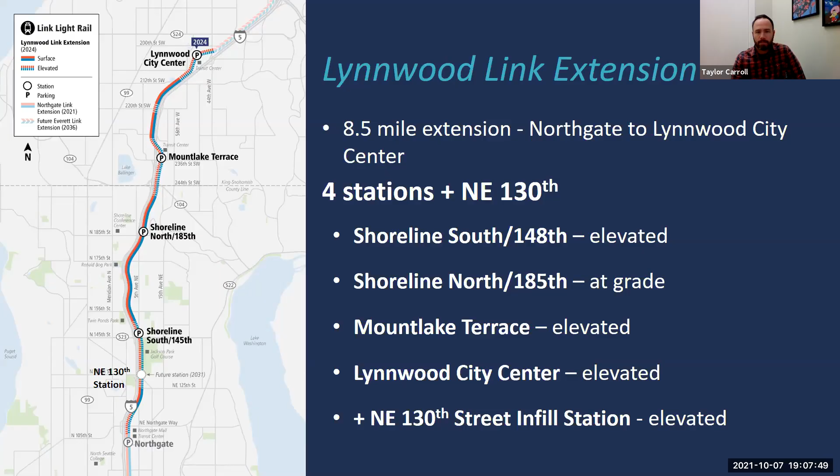So I have a couple slides here that dive into the Shoreline South 148th station. I recognize some of you may know this as the 145th station, and yes, the name of it has changed to the 148th. It's a more accurate description of where the station is actually now located, at the site of the former North Jackson Park and Ride.

As you see here, we have this great aerial view of a rendering. This station is a pretty large station that has bus turnarounds located within the station footprint, as well as an over 500 stall parking garage. And then it's an elevated station serving that community in this area.

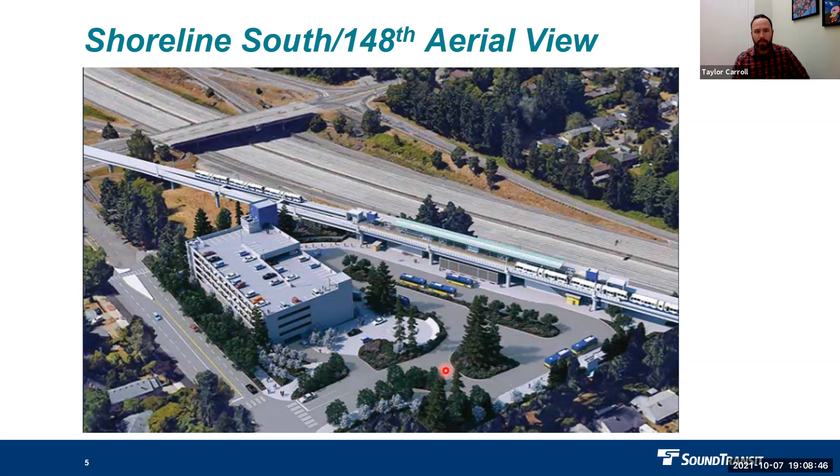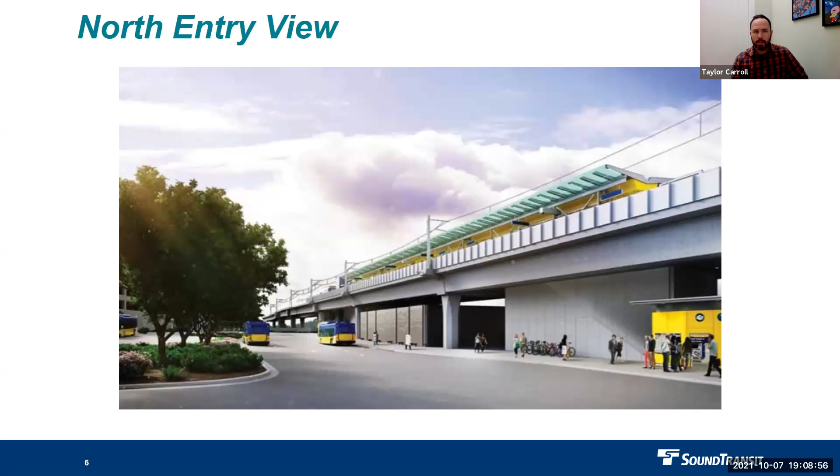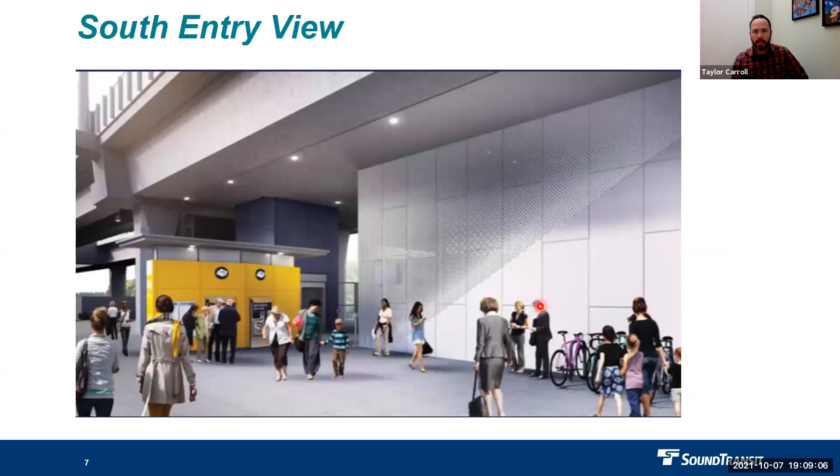A few other slides just to show some renderings of what the finished station will look like. Here's a view from the north entry. Here's a closer up view of the south entry with ticket kiosk, escalators going up. Up on the platform, the view looking south, you can see the garage in the distance there.

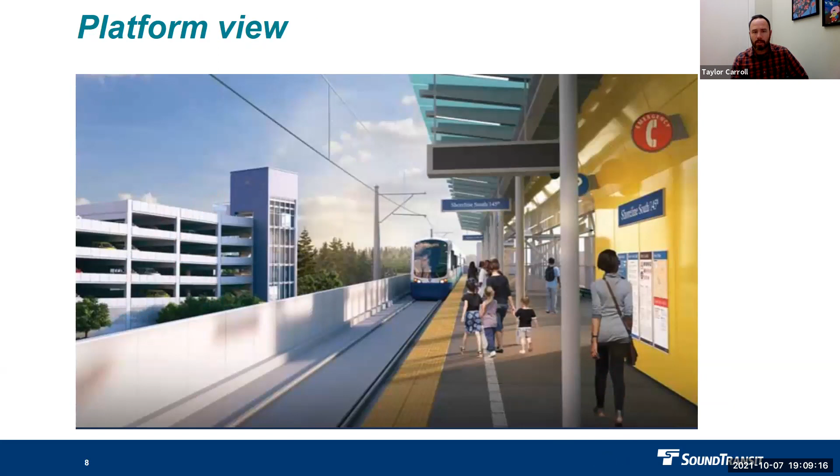And then here's a view of the station garage, which will serve patrons getting to and from the station who are coming from a little bit farther and are driving to the station.

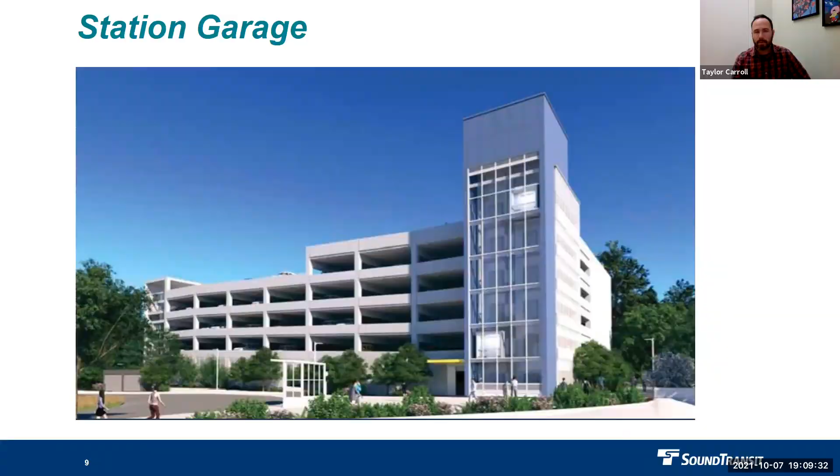All right, now the topic we've been waiting for, the Northeast 130th infill station. As Renee mentioned, there's been a lot of history around the Northeast 130th infill station. It all came to fruition with the passage of the 2016 ST3 voter package. In that voter package, we had a timeline of starting the work on the station in 2024 with an opening date of 2031.

However, over the past couple of years, we've had the realization that working on an infill station during an active line creates difficulties with construction, and so we started looking at accelerating the timeline of the project. Over the years we've accelerated the design, and this all culminated with the latest discussions at the board with the realignment in August of just this year. They've decided to have an opening date of 2025 for this station.

Hopefully you all know where it's located. It's in North Seattle at the corner of 5th Avenue Northeast and Northeast 130th. A few details of the station: it's an elevated side platform station. The majority of stations that Sound Transit builds are all center platform stations.

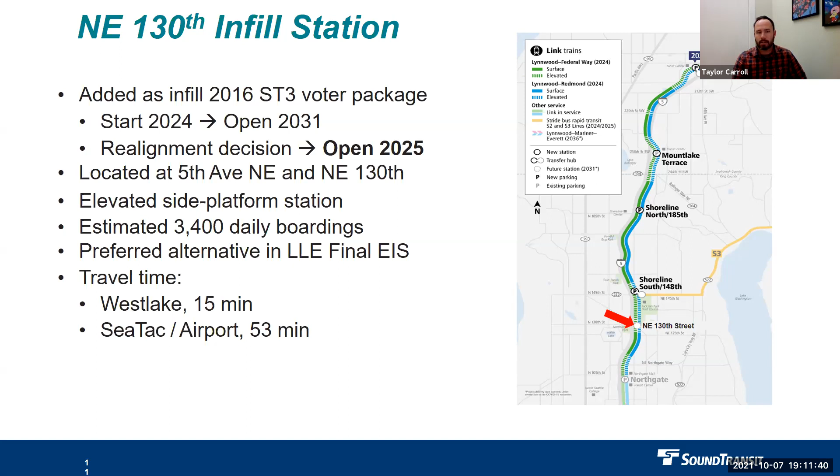Estimated 3,400 daily boardings. And you can see some travel times here to popular destinations like downtown Seattle and to the airport.

Just outlining some of the reasons why we were looking at accelerating, why it just makes sense to accelerate the timeline of the station.

If we were to be constructing the station along active rail, we've estimated that it could disrupt up to 61,000 daily riders, most of those riders coming from north of the area into the Seattle metropolitan area.

In order to accommodate this impact, we would have to use some single tracking, which would cause delays, and those delays could have a ripple effect throughout our entire system. It also makes it more difficult to construct the station during active rail.

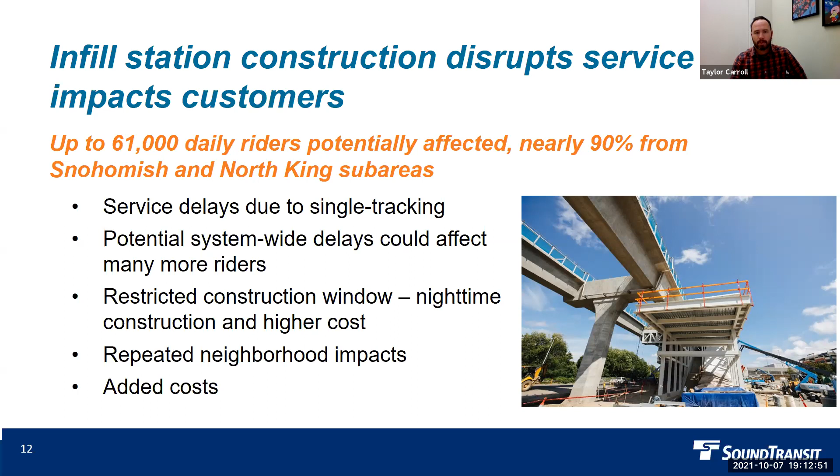And of course, if there were a pause between when we built Lynnwood Link and when we built the station on the original timeline, that would have multiple impacts to the neighborhood as well as some extra costs. So we're pretty happy to accelerate the timeline here.

Here's a big picture overlook of the schedule for the 130th station as it overlays with the Lynnwood Link extension. Orienting you to this graphic, Lynnwood Link extension is in construction right now, with a planned opening date of mid-2024. The 130th station is broken up into a couple of different packages.

One package is already in construction right now, slated to be completed pretty soon, by the beginning of next year. What's in front of us is a decision by the board to authorize us to go into construction and to release the budget to enter into construction.

A few important dates I'll go over again at the end of the presentation: next week on October 14th, we are going to take the project to the board for release of some funds for early procurement items. The biggest board decision is going to be for the project to enter into construction. We don't have a date yet, but it's targeted for Q1 of 2022, there's a typo on the slide showing 2021.

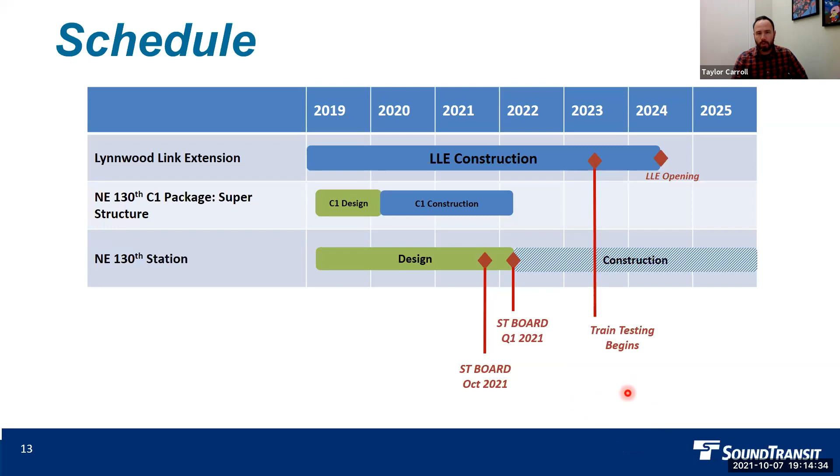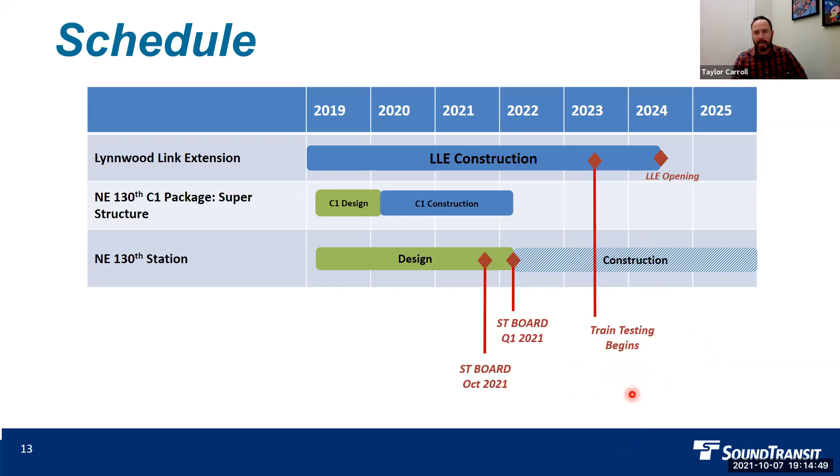I like to use this graphic as an illustration of why we're trying to accelerate the construction of the station, why it just makes sense. Train testing is going to begin in 2023, and as soon as train testing begins, it makes construction along that active rail line a lot more difficult.

Getting into some more details on Northeast 130th and what we're looking to do for the neighborhood and providing access. I first want to orient you to this graphic. I recognize there's lots of information here and the print is really small. First and foremost, the north arrow is to the right, so that means south is to the left here.

And then we have I-5 on the west side. In general, we have two main access points to the station, one on the south side here and one on the north side.

The idea is that when people get dropped off via bus at these two bus stop locations, the majority of folks are going to be entering the station on the south side. So you have south side stairs located right there, escalators right here, and two elevators sitting across from each other in this location.

Another drop-off point and access to the station is a car drop-off area. Cars would come up north on Fifth Avenue, get into the drop-off area, and then access the station on the north end. We have stairs here and elevators located right here.

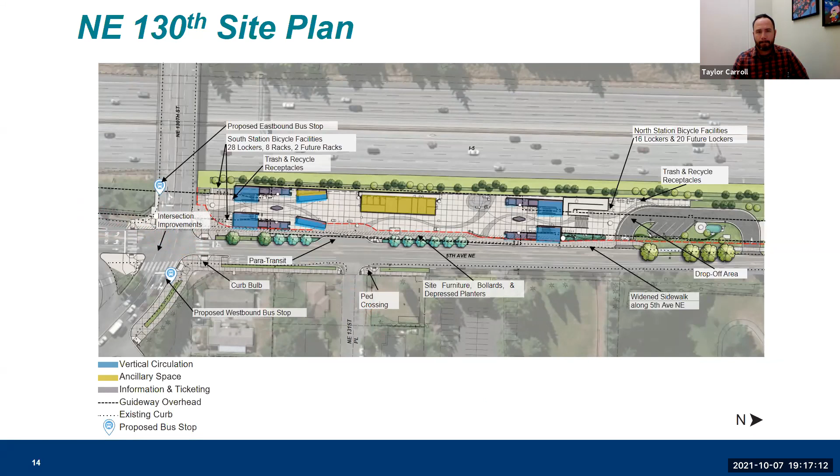All right, need to give the computer a minute to think. All right, here we go.

Now that you're a little bit familiar with the layout of the site, I'm providing information here about site access. I know that this is a little bit hard to read, but hopefully I can orient you to these different lines, which represent where and how people are going to be accessing the station.

This is our guidance on how we're thinking about designing the station for how people are getting there, and the improvements that surround the area so people can get to the station safely. As I mentioned, we have public transit buses from King County Metro. These blue lines show folks being dropped off at these two locations, then crossing 130th to the station, or crossing Fifth Avenue to get to the station on the south.

Pedestrians would be coming from multiple areas: on the west side, the community crossing the bridge to access the station; from the east side, from the neighborhood areas; and there's Jackson Park and the golf course right in this area with a community trail folks might use to get access to the station. The green line represents bicyclists coming from north and south, and east and west. And then of course, vehicles—we are encouraging vehicles via the design of our station to come and utilize this drop-off area. There is no parking associated with this station.

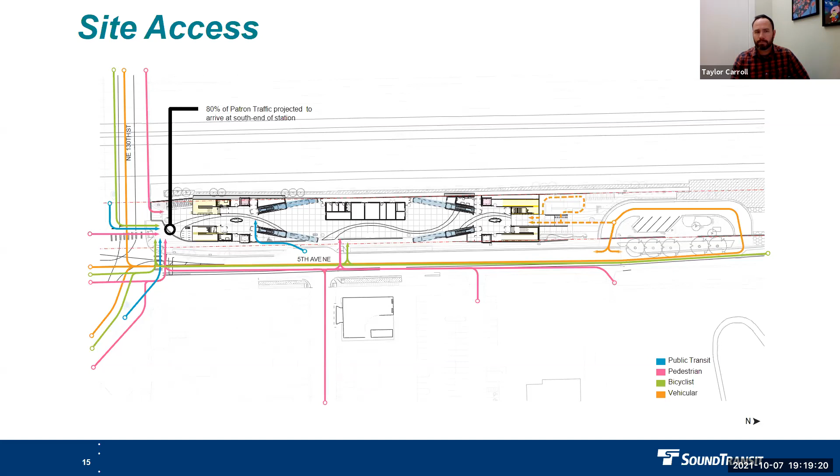Just like at the Shoreline station, I have a couple of renderings that give a better illustration of what the station would look like. We're still working on the design—it's definitely not finished. I'll go over a couple of opportunities for the public to weigh in on our design in the future.

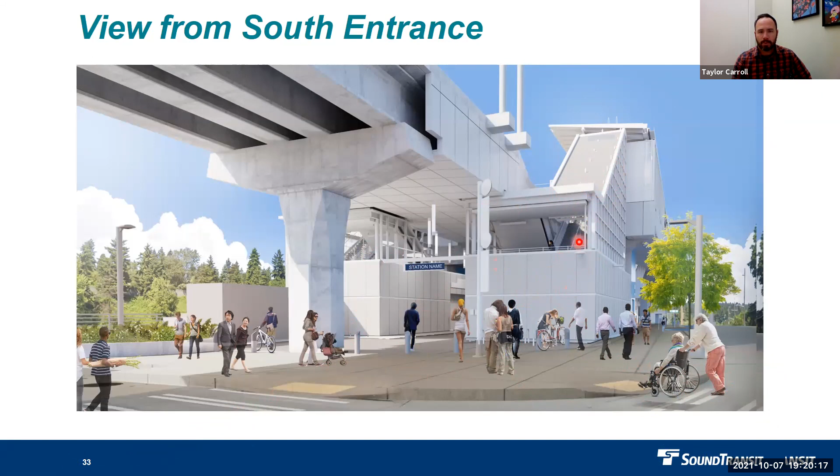This is a view from the south entrance, where the majority of folks would be entering the station. You can see people coming across Fifth Avenue or across 130th, and then entering the station. You have side platforms, so you have vertical circulation on both sides to get up to the platform level. What you see here are mostly the stairs and stair infrastructure.

Once you're in the lobby area—this is looking at that same south entrance, but from the north looking south—once you're in the lobby, you would come through that area, pay at the ticket kiosk, and then access the stairs in these locations, whether you're going south or heading north.

The design team is working on what the finishes are going to look like—finishes being underneath that platform area, on the ground here. A key element to finishing that design is thinking about how we encourage people to understand where to get where they want to go from where they're currently located. So it's all about wayfinding and how they get there.

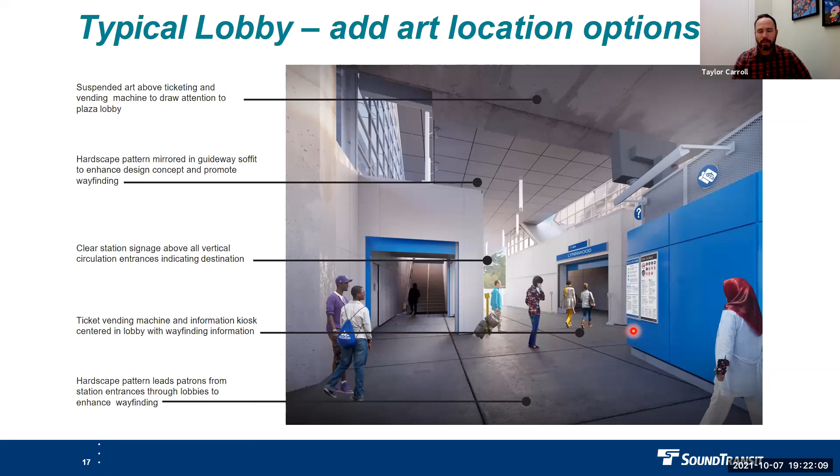And then, if you're familiar with our stations—I just did a tour of the Northgate extension—I always enjoy looking at the art and what the artists come up with as part of any station build. We have a 1% for art budget, and that applies to this project as well. We go through an art process where the artists come up with themes for the station and work with us on the locations they'd like to use. We try our best to allow for artist discretion, so they can use their artistic abilities and express art in a variety of ways.

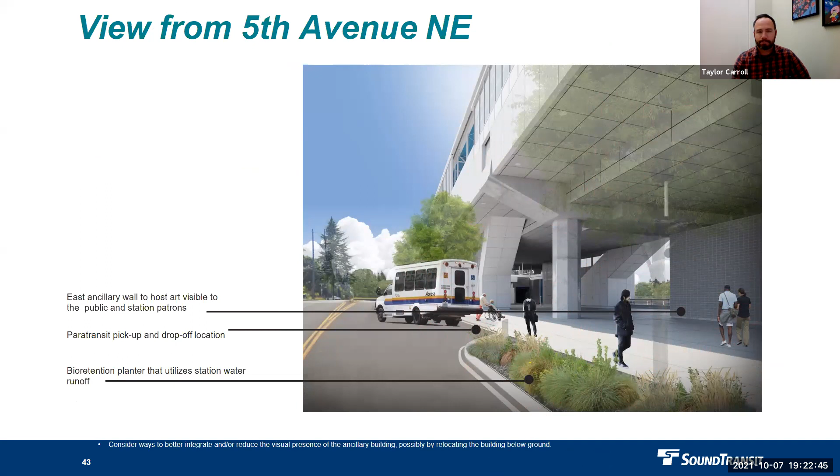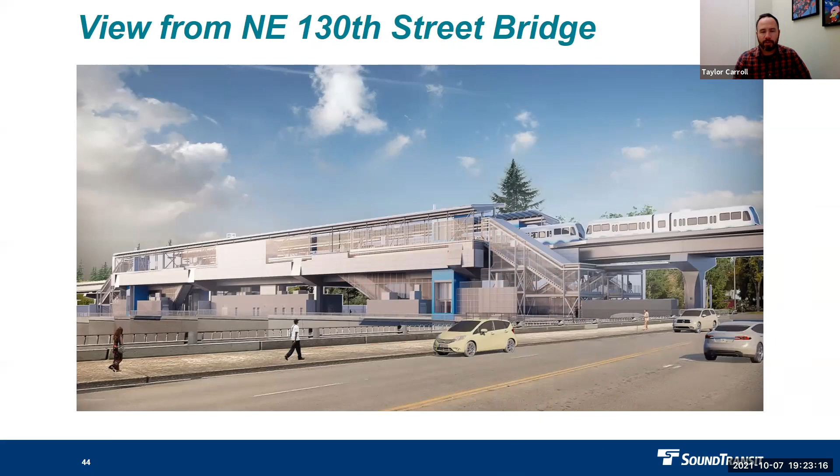I believe I have one or two more—this is my last slide on what it would look like, from the bridge crossing over I-5. On this side you can see the vertical circulation coming up: these are the stairs, the elevators coming up here, and the escalator located right here. This would be a similar view as if you were driving along I-5.

Public engagement to date: we've conducted a couple of different open houses and planning workshops. Another opportunity for the public to weigh in is to attend the Seattle Design Commission meetings—we held one in April 2020. We've also partnered with the city on business community outreach in late 2020. The latest open house was almost exactly a year ago, and we had another presentation to the Seattle Design Commission in May. As mentioned, we've gone to the board a couple of times, and the board has heard your voices, deciding to accelerate the station's timeline at the August 5th realignment discussion.

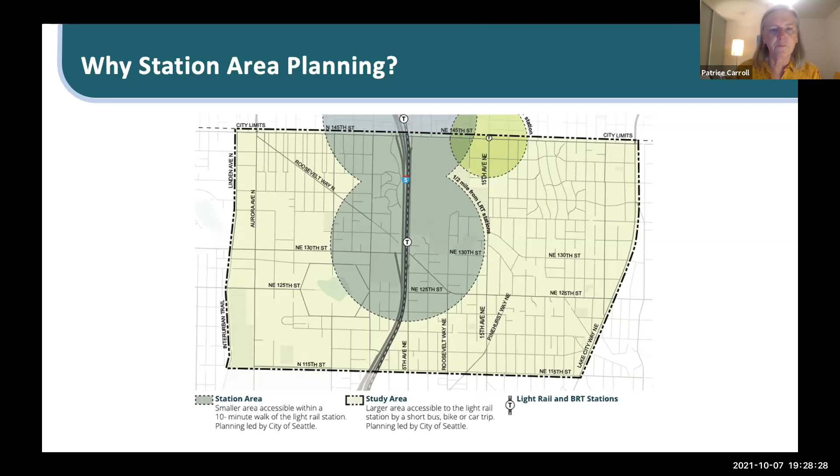Our schedule has lagged a little bit, but we issued our draft station area plan last March, and we're going to finalize that by the end of the year. Now that Sound Transit has gone through its realignment process, and we have a much better idea of when the 130th Street station is going to open, we are preparing to move forward to our next phase of work, which will begin in 2022. That will be a zoning study, an EIS, legislation, and coordinating with other departments around capital planning and transportation access projects that might happen in the area. We've come a long way from when that decision was made to add this station back into the ST3 package, so things are going to start moving much more quickly.

Again, I'm not going to go through the draft plan, but we do still have the information—we haven't finalized the plan. If anyone has last minute ideas or suggestions, it's not too late. I invite you, if you haven't spent time with the plan, to go to our website, review the video, look at the document, and also the frequently asked questions that have come up as various people have been reviewing the plan and sharing their thoughts.

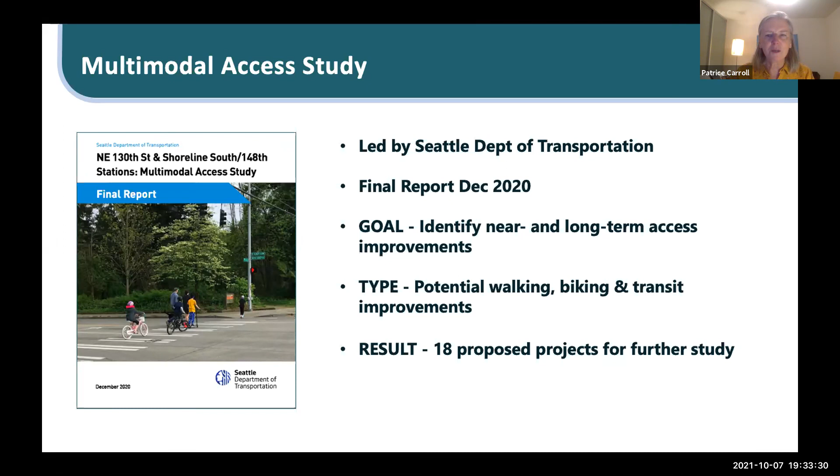Hopefully you'll see a lot of them in our next transportation levy, which is how a lot of those projects might get funded. But yeah, SDOT will be by to talk to you about the multimodal access study.

This is just a snapshot of the latest cycle of community engagement we did after releasing our draft plan. It's by no means the only engagement we did through this process. We started a couple of years ago with an open house, then had a workshop. Our goal is always to have an online opportunity for people who can't come to a live event, but then once the pandemic hit, we pretty much had to shift to all online.

Some of you might have participated in our community conversations in the summer of 2020. Most recently, we had an on-demand online open house to walk people through the draft plan and solicit feedback. Renee also organized a question and answer period in the spring with about 20 people joining. We also did some direct mailing, going back to old technology during this pandemic, relying on postcards and mailings, so about 300 households got a summary pamphlet about the draft plan.

We've been available, and some communities like yours have organized events and invited us to talk about the draft plan. Councilmember Juarez has also helped us get the word out, and we have our own city media websites and emails. We do have a specific list for this project, so if you haven't signed up, please go to our website and sign up to get all the future notifications about that.

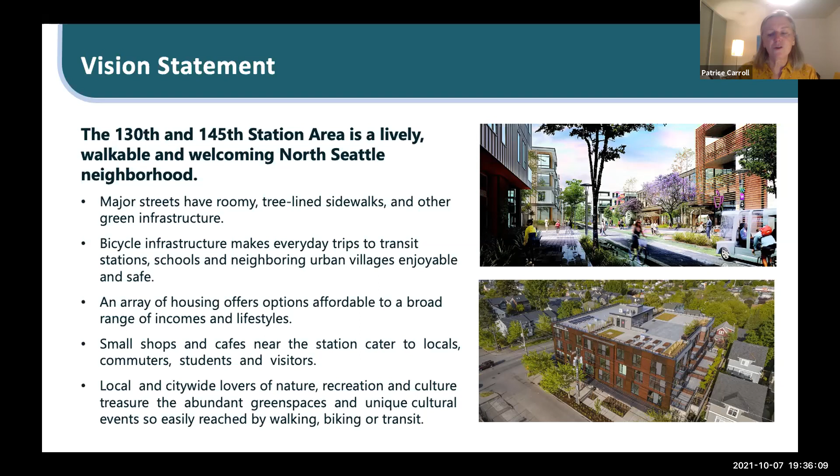And why were we doing this? We really wanted to do something during this very important time when the elected officials were weighing the future and the construction schedules for these projects. We very much wanted this project to come out of that process in a good place. So we thought even this minor action would put something on the books showing we are really committed and serious about transit-oriented development around this station. I think maybe some of it worked, because we know the outcome was that the station was accelerated. So that was very good news.

Council did approve what we proposed, a future land use map amendment. Not new zoning, but something that says we need new zoning in this location, because right now our zoning and our future land use map are inconsistent. This future land use map now says that we should have mixed use along Fifth Avenue, right across from the station, and some multifamily residential on the rest of that block. Currently the zoning for this block is all neighborhood residential, which is the lowest density zoning that we have.

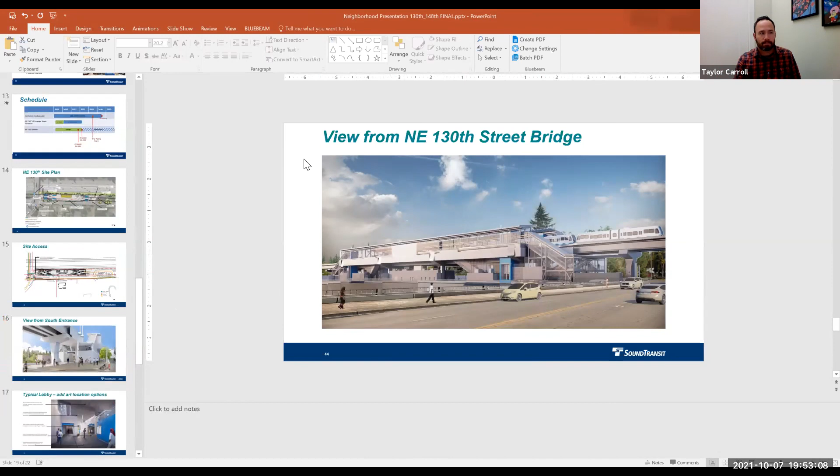Perfect, thank you. I can't tell you how many times I've gotten on the wrong train going the wrong direction, and it's so nice that you can just get off and go down the other side—but that makes a lot of sense in terms of construction. Thank you for explaining that. Sure.

So is there a reason why there have to be vertical walls that enclose the elevators and stairs? It seems like it doesn't seem safe with limited visibility and doesn't allow for direct pedestrian flow.

Great question. It gets into design and what our finishes look like. There are several things we're trying to balance when designing a station. Living in the Northwest, a wet location, we want to make sure our customers are protected from the elements. One of the best ways to do that is to provide glazing on the sides, and enclosures around the stairs help with wind and rain protection, keeping people out of those elements.

But that is in balance with safety, making sure we don't have areas with blind spots where people can hide and lurk in the shadows. That's what's called a CPTED issue - you design for crime prevention through environmental design. That's the acronym for CPTED.